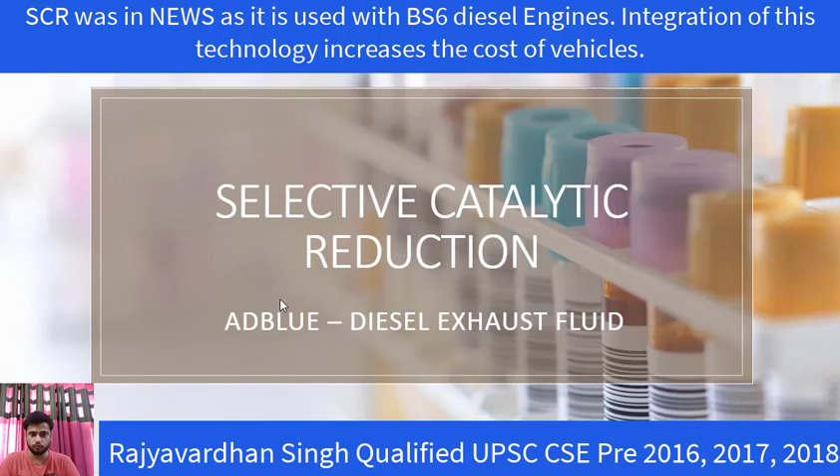Further in this video, we will also discuss the AdBlue fluid. AdBlue is basically diesel exhaust fluid, and it is urea, an aqueous form of urea. So what is this SCR, selective catalytic reduction?

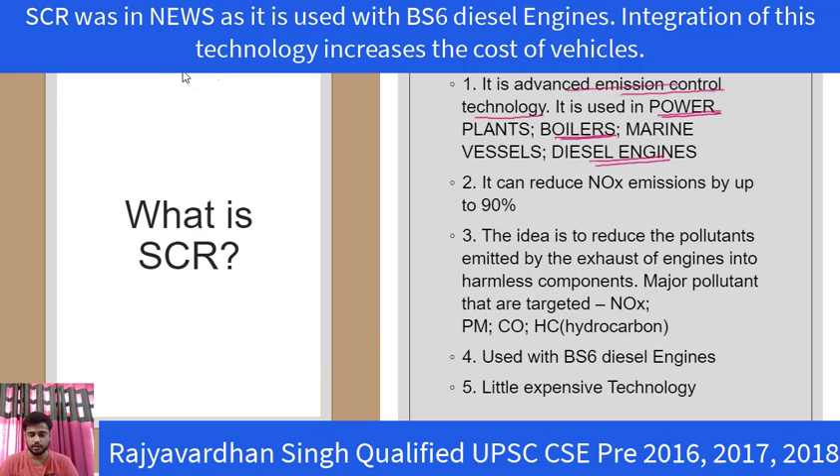It is an advanced emission control technology, and this technology is used in power plants, boilers, marine vessels, and now in diesel engines. So why are we studying SCR? We are studying SCR because the Supreme Court has banned the manufacturing of BS4 vehicles, and the RTO also cannot register BS4 vehicles from April 2020.

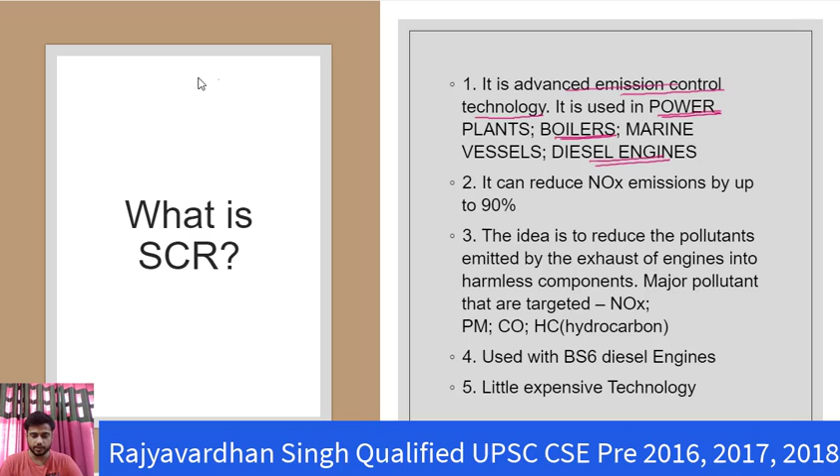So in order to upgrade the BS4 diesel cars to BS6 diesel cars, we have to use this SCR unit, selective catalytic reduction unit, with the diesel engines. It shall be used with the diesel engines to make them BS6 compliant.

The major pollutants emitted by the exhaust of engines are nitrogen oxides, particulate matter, carbon monoxide and hydrocarbons. So the idea is to reduce the pollutants emitted by the exhaust of engines into harmless components like CO2 and H2O. This SCR technology can reduce nitrogen oxide emissions by up to 90%.

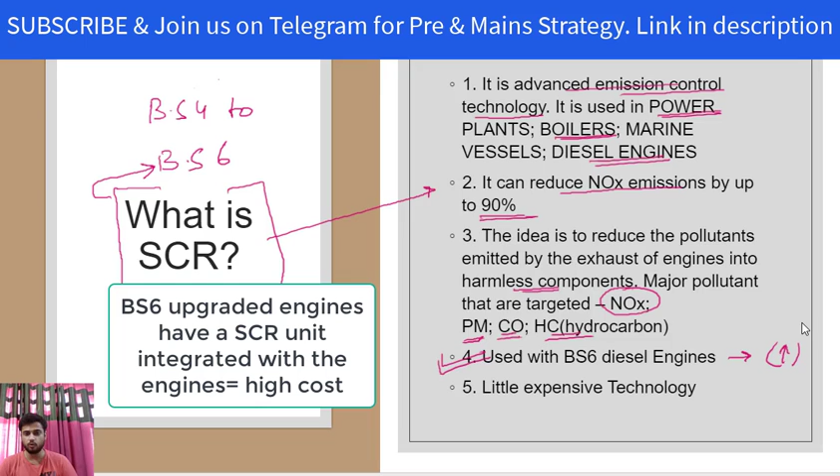And this technology is used with BS6 diesel engines, because of which the price of BS6 diesel engines has gone up. And for this reason, companies have started to phase out diesel engines and are making only the petrol variant of the cars.

So what are the benefits of using SCR? By using this technology, nitrogen oxide emissions can be reduced by up to 90%, and hydrocarbon and carbon monoxide emissions can be reduced in the range between 50% to 90%, and particulate matter can be reduced by 30 to 50%. So the benefits of using SCR technology are huge.

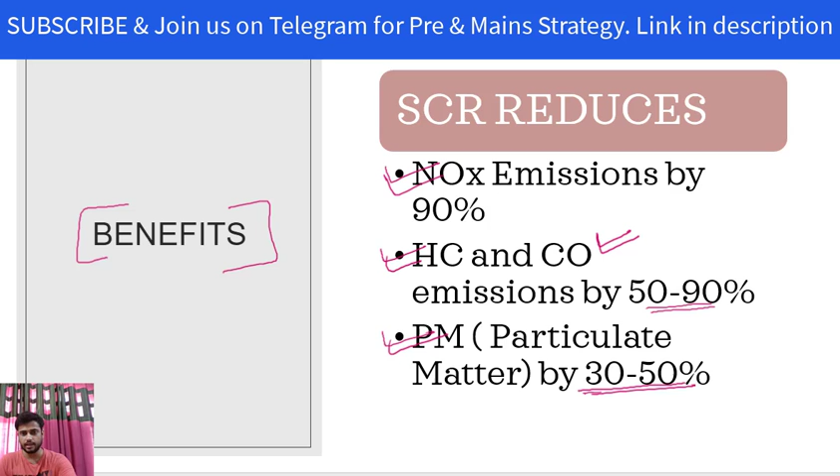Now we shall look into the chemistry of SCR technology. In SCR technology, a reducing agent converts nitrogen oxide in the presence of a catalyst into harmless nitrogen and water. Nitrogen and water are natural components of the atmosphere, and the reducing agent used is ammonia. So the final reaction is something like this.

Ammonia reacts with nitrogen oxide in the presence of a catalyst, and the catalysts are vanadium and tungsten oxides. So in the presence of the catalyst, ammonia reduces the nitrogen oxides into harmless nitrogen and H2O. The catalyst uses vanadium or tungsten oxide coated on a titanium substrate. So the reducing agent in this reaction is ammonia.

In SCR units we cannot use ammonia directly, and for that reason we use an aqueous solution of urea, and urea acts as a source of ammonia. This aqueous solution of urea is known as AdBlue. AdBlue is our diesel exhaust fluid, and its rate is 127 rupees per liter. So this is the final reaction.

In the first reaction, the AdBlue liquid, an aqueous solution of urea, will be mixed with the exhaust of the engine, and by mixing the urea with the exhaust, ammonia and CO2 will be produced. CO2 will escape from the engines, and this ammonia will then react with nitrogen oxides. This ammonia will reduce nitrogen oxide into harmless nitrogen and H2O.

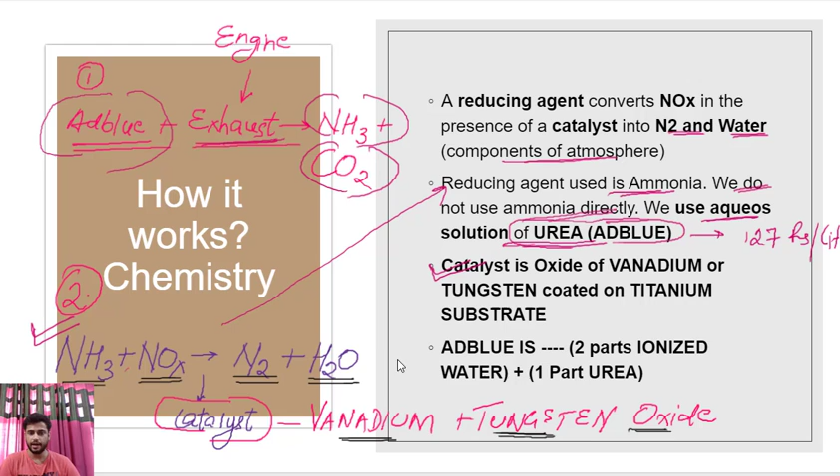So this is a schematic diagram of SCR technology. This is the diesel engine, and the exhaust contains hydrocarbons, nitrogen oxides, carbon monoxide and particulate matter. It will first go to the DPF unit, diesel particulate filter. This filter will remove 85% of the soot, and then the exhaust will be put into the SCR unit.

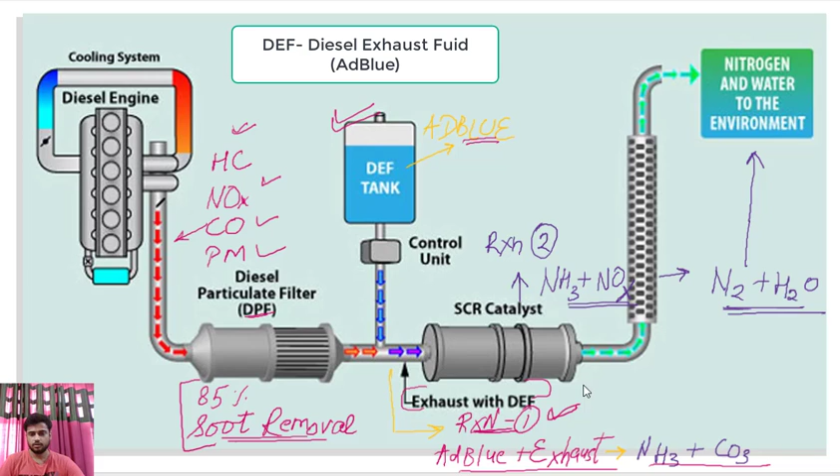This is the DEF tank. It contains AdBlue liquid. This AdBlue will be injected into the chamber where it will be mixed with exhaust. So here reaction 1 will take place. AdBlue and exhaust will release ammonia plus CO2.

So when we mix the AdBlue with exhaust, ammonia and CO2 will be produced, and then in the presence of the SCR catalyst, which is vanadium and tungsten, reaction 2 will occur, where the ammonia will reduce nitrogen oxides into nitrogen and water, which are harmless to the environment. So this is all about the SCR technology.

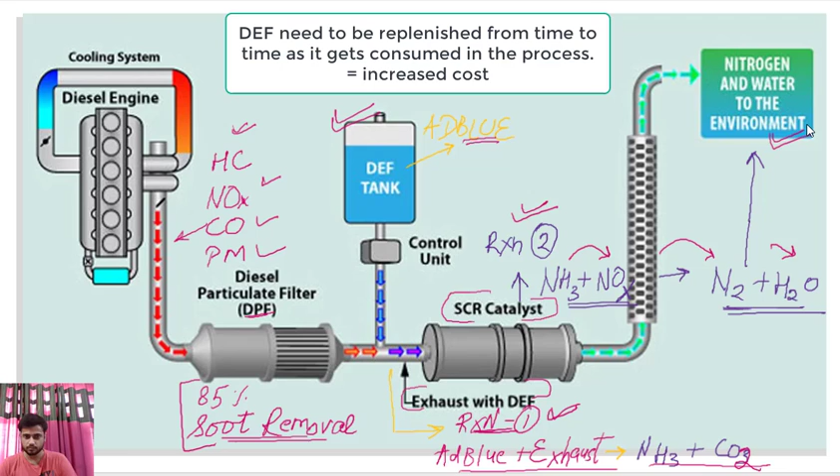In order to reduce the harmful pollutants into harmless components, we use the SCR technology, and to use this technology, we have to spend a little extra. That is why the prices of diesel engines have gone up, and companies have started to phase out diesel engines and are making only petrol variants, which are compatible with CNG also. So this is all for today.